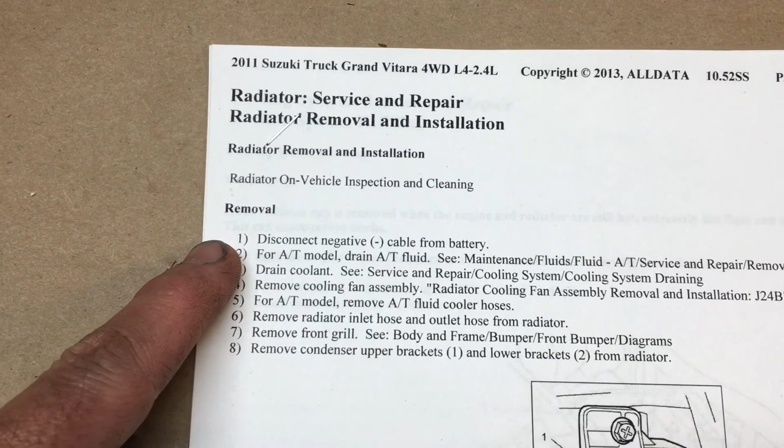Disconnect the battery cable, of course, standard stuff, right? Disconnect the negative. You can see I've got everything actually removed. There's no real requirement to drain the transmission fluid. I can assure you very little loss in fluid actually transpires when you disconnect the cooler lines. I'll show you those on the rad itself. Drain the coolant, it's obvious.

Remove the fan assembly. Here's the fan assembly actually here. That's what it looks like. Pretty straightforward, really only 3 fasteners, a couple of connectors. Don't want to labor the point about that. Straightforward.

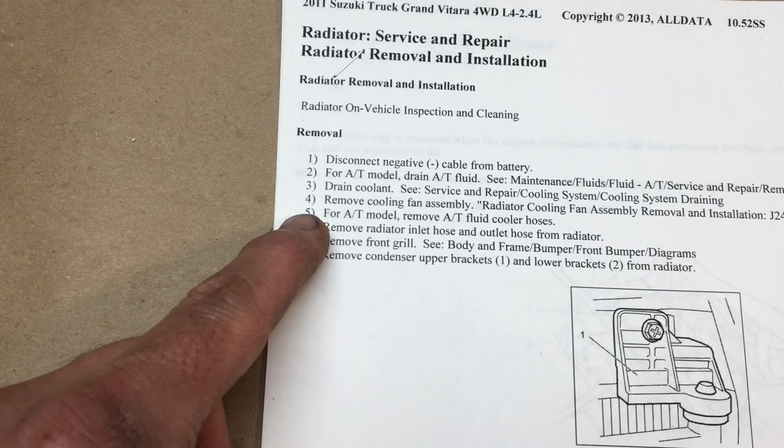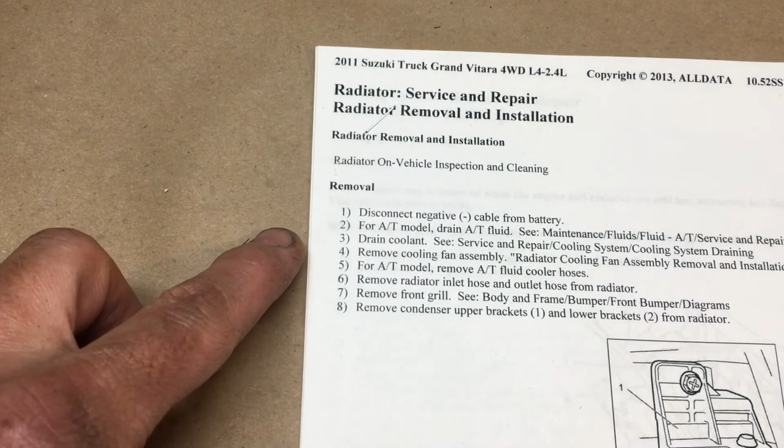Disconnect the cooler hoses. I'll show you the cooler hoses down the bottom. Have a couple of these at the ready so you can plug the lines, and as I said, you'll end up losing very little. It's pretty straightforward—2 lines, a couple of clamps, very simple, very straightforward.

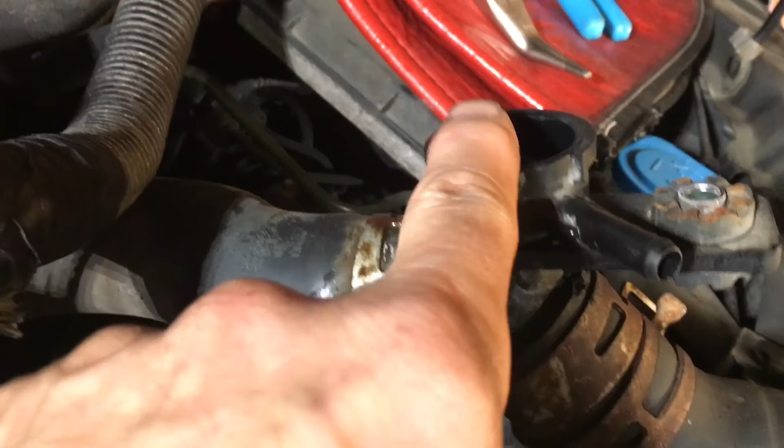Remove the radiator hose inlets. A wee bit unique here—when I actually got the rad, I went into a bit of a panic because I didn't see any rad cap coupling assembly, and it's actually on a little bit of an elbow assembly. The line itself goes to the top, so the rad cap is remote from the rad—that's the upper line, and there's the lower line. Hopefully you can see it sitting right there.

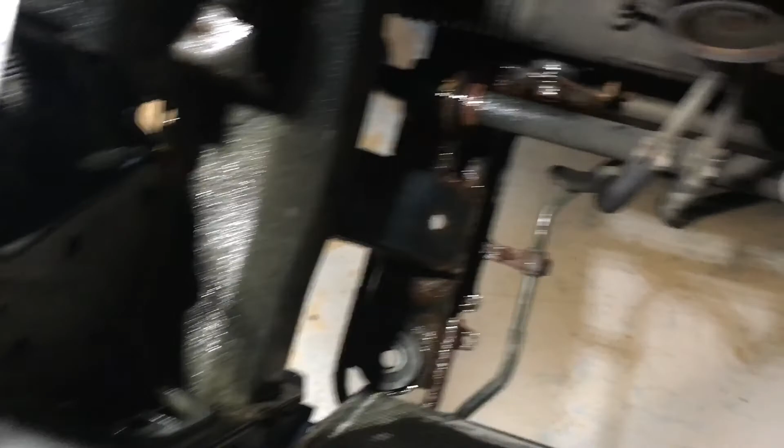Yeah, everything's obviously removed. I've just treated the structure a wee bit—this is Canada, so corrosion sets in on absolutely everything, so I've put a wee bit of corrosion inhibitor on everything. The mounts are down there, the rubber mounts, as you can see. The condenser coil is not looking good at all—it's actually falling apart, the fins are in bad shape. Bad shape.

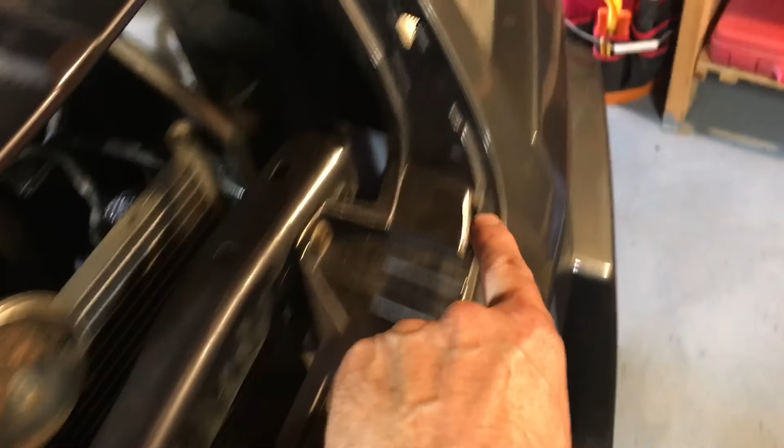So way down here it actually tells you to remove the grill. Of course, that should probably be one of the first steps you do. Take your time removing the grill here—these plastic clips are quite delicate, and if I'm honest, I had a few casualties, but I think I can salvage it. Should be all right.

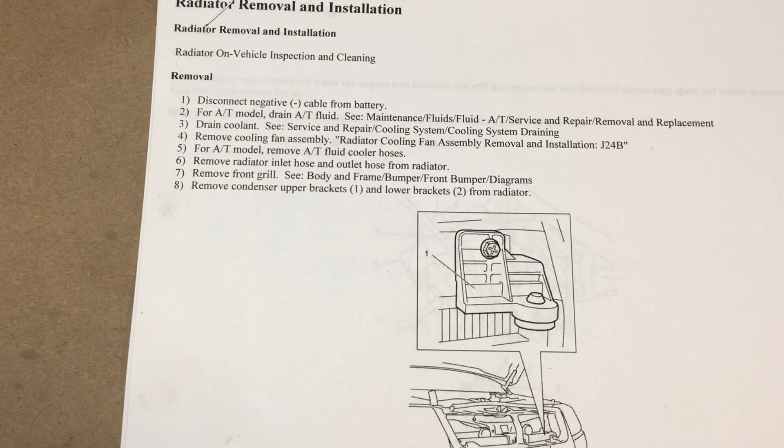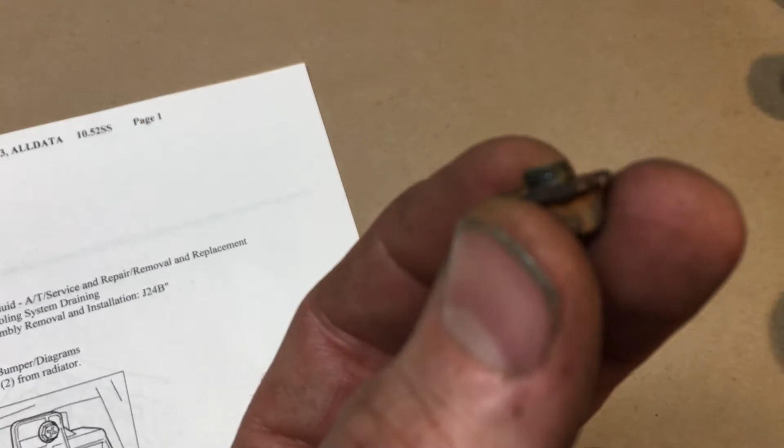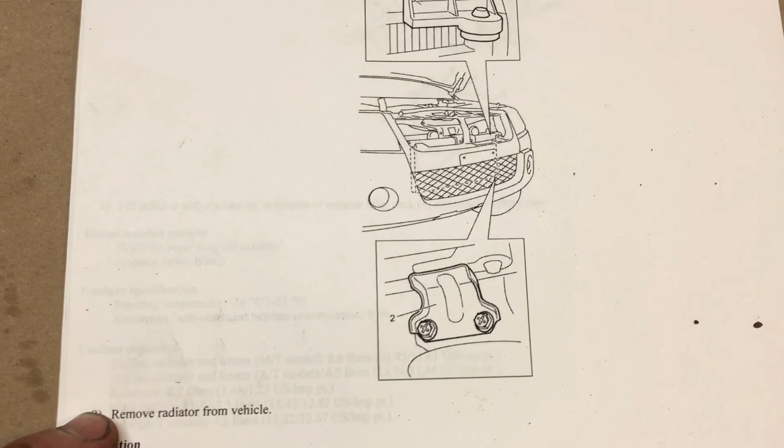Yeah, the brackets—I'll show you, I'll take you over to the rad and show you what you should be careful with. These brackets, corrosion sets in on these bolts, as demonstrated by this one. Fortunately the anchor is actually on the new rad, so it's just a matter of replacing this sheared bolt, 1 out of 6. There's only 1 screw on the top and 2 on the bottom of each bracket, for a total of 4 brackets, 6 bolts.

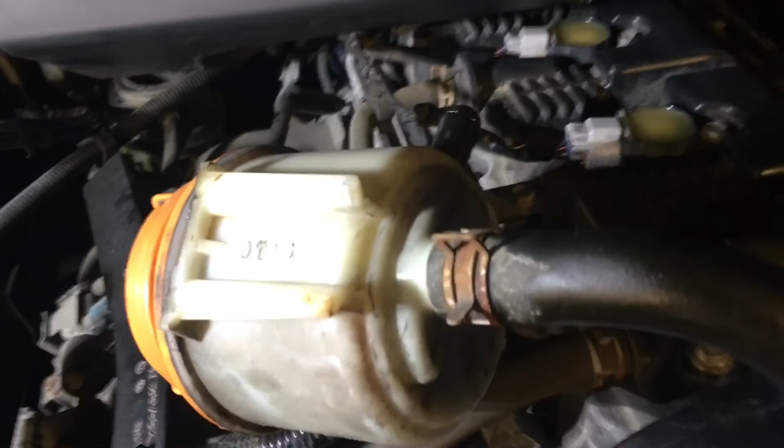That's pretty straightforward. And then you have to get some stuff out of your way. Again, plugs come in handy so you don't lose the fluid, everything guys. Move everything out of the way so you're not risking damage, especially to your new component as it goes back in. Remove the ground here, the engine ground. Pretty straightforward. Let me show you a bit more detail in here.

The lighting's a little bit better. So it's not difficult, take your time, don't break in and cause yourself more grief. Yeah, a wee bit of ductwork and stuff has to be removed. It's not detailed in the manual, but what's new?

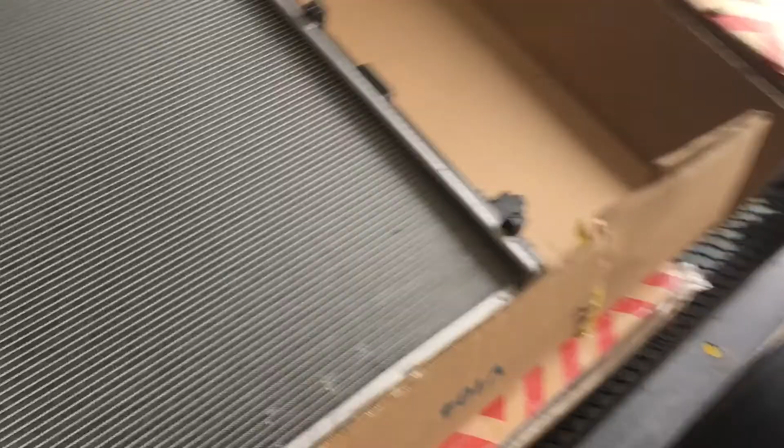Again, let me take you over to the rad—so here's the new one. There's the part number, it's a Denso, as I may have mentioned. The price, very reasonable, right? $96, that's American of course, so that's like $130 Canadian. And the shipping was a wee bit dear—again, that's American, the shipping was $80, but that's fine. It all arrived in one piece, so yeah, pretty reasonable cost.

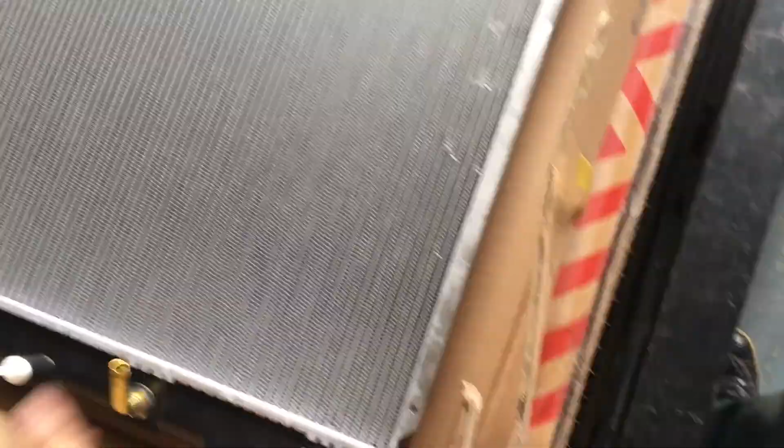Keep in mind that part number is for automatic transmission. May be different if you're dealing with a manual, because of the cooler. Already showed you the receipt for that. It looks identical, I'm happy to report. As I said, no rad cap on the top, so when I first saw that, I thought that's not the right one. But it is in fact the right one.

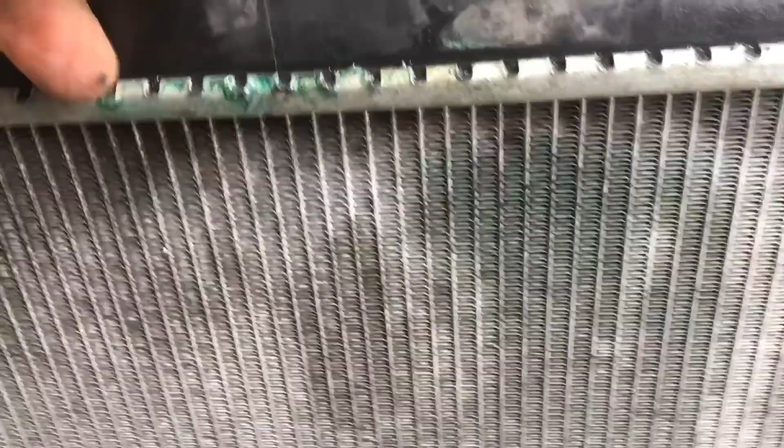Here's the old one, and here's where it actually appears to be leaking from, this seam right here. That seam seems like it's where the plastic tank is cinched together at that component, and it wasn't leaking from the line down, checked that, this was all dry underneath here. The top seam seems to have gone. You can see some staining on here as well. Perhaps there's been a small leak elsewhere.

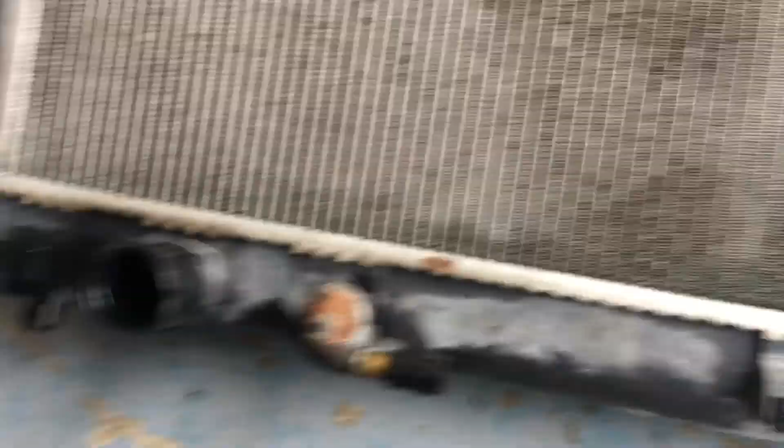The new one comes with these caps, which nicely keep all the residual transmission fluid from spilling out in the cooler section here. Just transfer the caps over as you're removing it. So that's it, all back together.

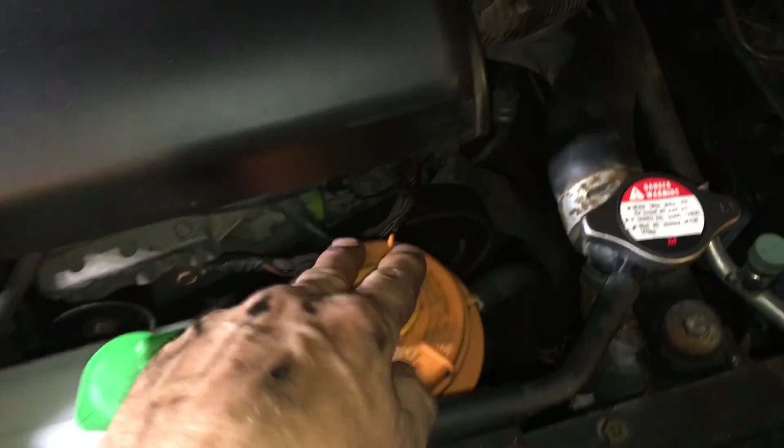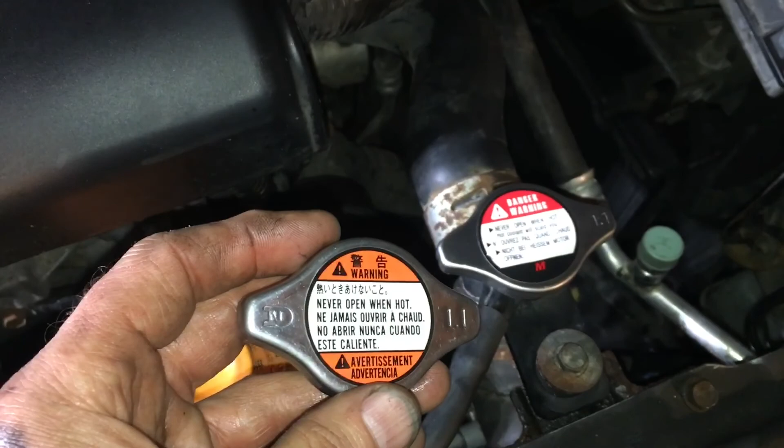You're going to need to remove the airbox assembly and the ducting, the power steering reservoir, and the applicable bracketry. One of the fellas made a good point in the comments - he said make sure you check the pressure cap, because if the system's over pressurizing, it could actually be causing the leak, that could be the root cause. I don't have a pressure tester, no pump or adapters, so for $18 at my local auto parts store, that made good sense to me, the suggestion. I'm sorry, I forget the fella's name, but I'll put it in the comments - very good suggestion indeed.

Yeah, so everything's back together, everything is leak checked. I'll have to put it through a couple of cycles, of course, in order to get the system to draw in under vacuum to make sure it's completely topped up. As far as I can tell, there's no leaks, top or bottom, which of course is nice. Plenty of heat, so that's a good thing.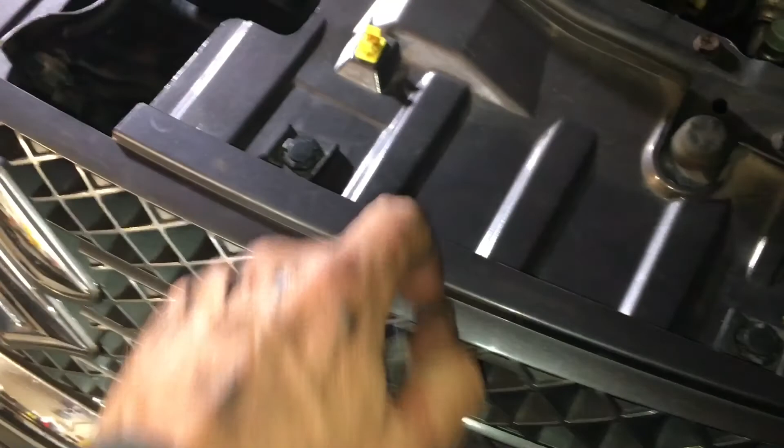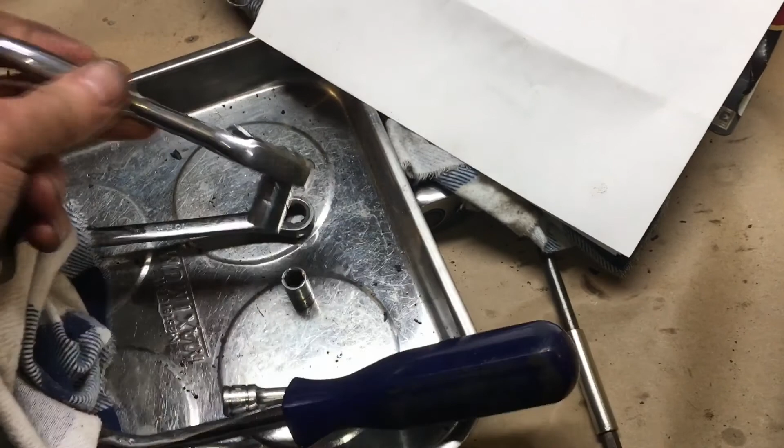Yeah, I guess that's it. This is actually kind of a, I won't say pointless video, guys, but it is really straightforward. The trickiest part is getting this grill off, and not that tricky once you know how. It's really straightforward, basic tooling. You can pretty much do the entire job with a 10mm socket, everything is 10mm it seems like. Just a basic pair of pliers will do, I don't have any fancy hose clamp pliers or anything - a pair of pliers like this is handy to get into a tight spot.

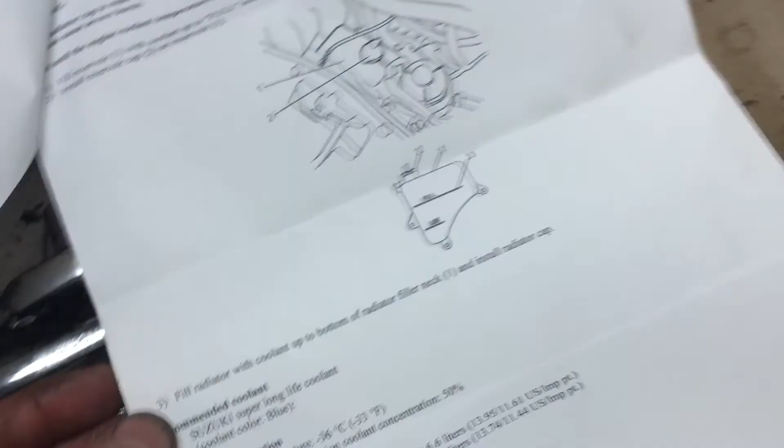The coolant that you actually require, let me give you the specs and the capacity. The manual recommends Suzuki long life coolant, but that's only recommended, so I actually used Prestone, which is kind of a universal. Here's the capacity - about 7 liters with the reservoir-ish.

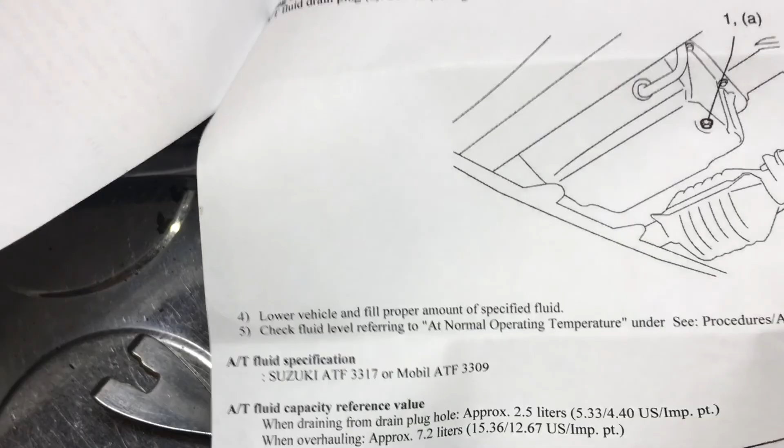Should mention as well, here's the spec for the transmission fluid. If you decide to drain it as per the manual, it is not required - I literally lost just a few drops when I swapped it over, providing you have the plugs, guys. Tells you how to check it, I did check it, it's all good.

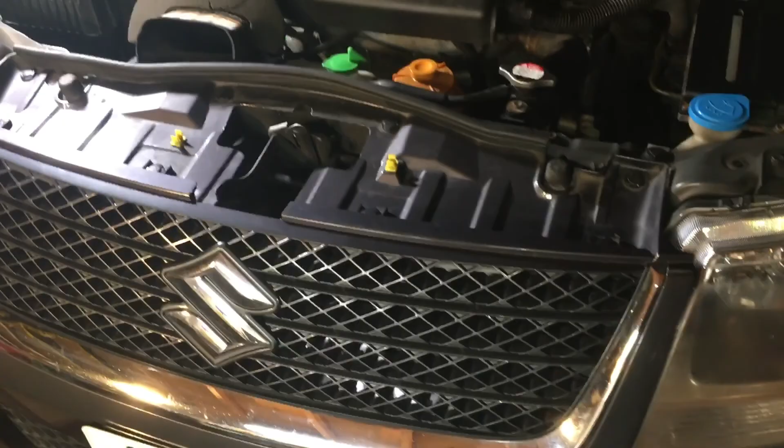Hopefully she's all well again. Cost, shipping included - reservoir was the shipping included - about 275 Canadian dollars to repair it yourself. So I was pretty happy with that. I'll put it through a few heat cycles, make sure everything is copacetic, and if there's any other grief, I'll give you an update, but I'm hoping not to, frankly. That's it, boys, cheers.